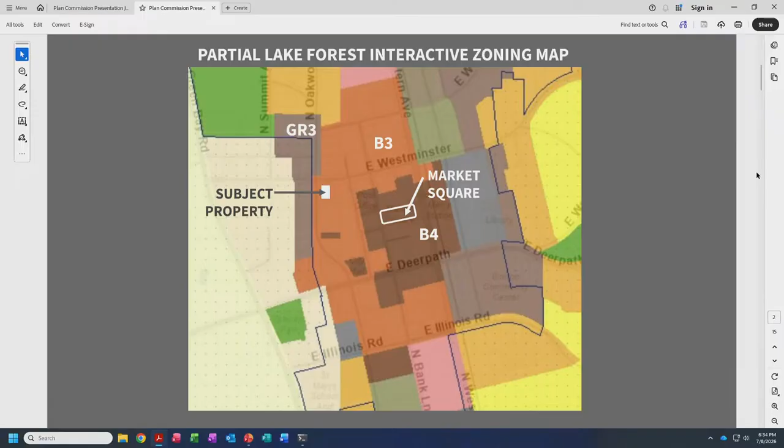Below our property is the large City of Lake Forest parking lot adjacent to City Hall. And to the left are the tightly knit GR3 residences that, even though the buildings are smaller in scale, are also quite dense.

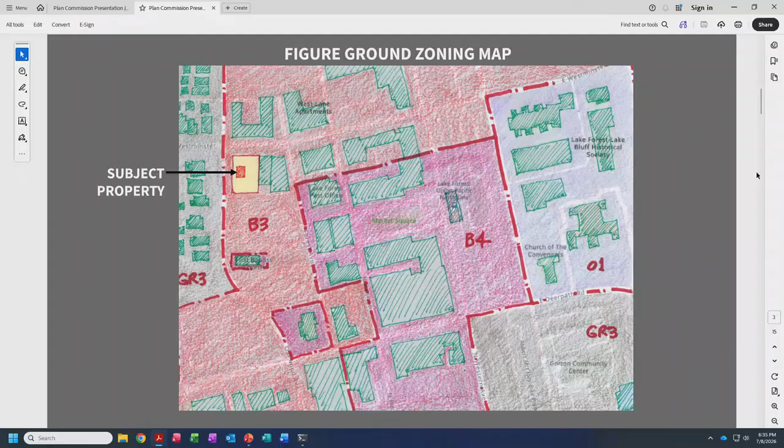According to the zoning requirements for this particular property, we are currently allowed to build up to 8,822 square feet of commercial building on the lot, or 0.75 FAR. As part of this code, we can request a special use permit to build up to 14,704 square feet, or 1.25 FAR, when 5 criteria are met.

As shown in the previous image, the existing building at 1,392 square feet is just 0.11 FAR. The existing building is woefully undersized for its lot compared to the allowable zoning restrictions. The property, in its current configuration, is not in keeping with the B3 commercial zone in which it is located.

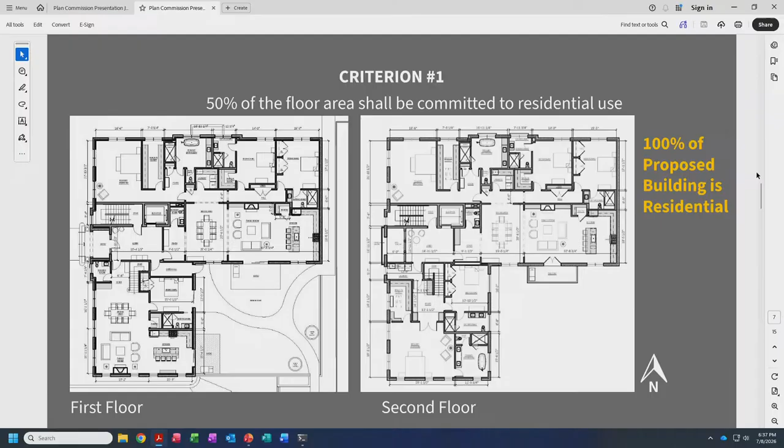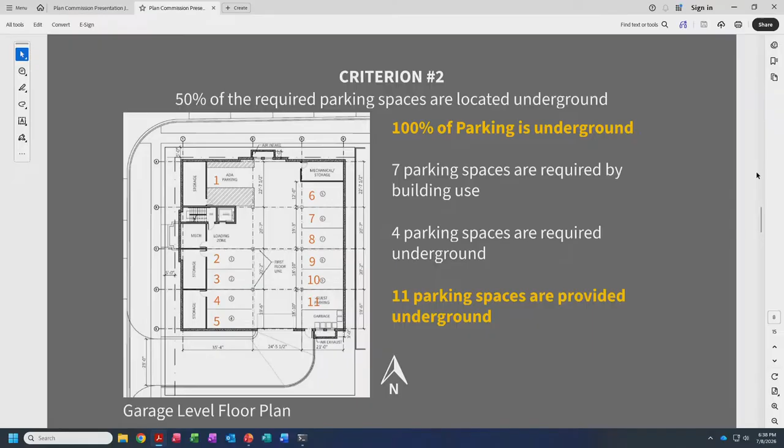Criterion number 5 states that the proposed building and landscape concepts must receive conceptual approval by the Building Review Board. This petition is currently proposed for Building Review Board review on September 2nd of this year. We intend on meeting the Building Review Board standards for the replacement structure and landscape design.

Following, I will show you our preliminary conceptual design renderings. Although technically not the purview of the Plan Commission, it's important to understand the building design in relation to our FAR request. Please note that the following building and landscape designs are continuing to be refined, so the concept renderings you are about to see may change slightly prior to our Building Review Board submittal.

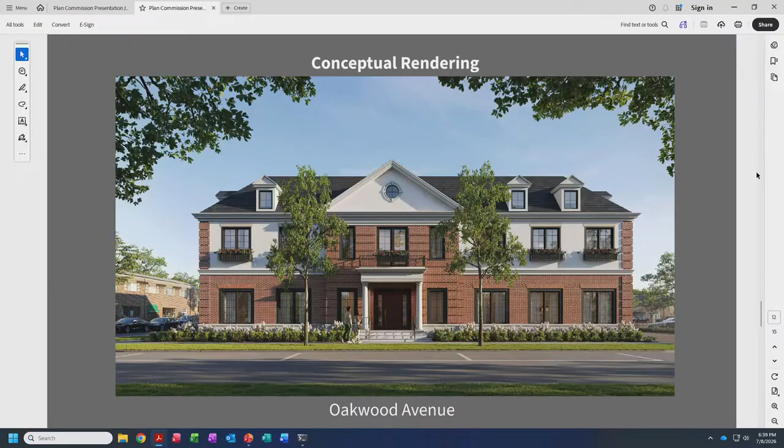This rendering illustrates the proposed Oakwood Avenue building facade. The design serves as a deliberate transition between the larger, more monolithic buildings within the B3 commercial zone and the smaller scale homes in the GR3 residential zone. The proposed building avoids the block-like massing characteristic of the commercial district by incorporating a two-story scale and sloped roof forms adjacent to the residential neighborhood.

This building massing provides an appropriate transition in scale and character. The prominent central brick feature and columned portico further reinforces the residential character of Oakwood Avenue, providing a familiar architectural element that helps bridge the scale and context of the surrounding neighborhood.

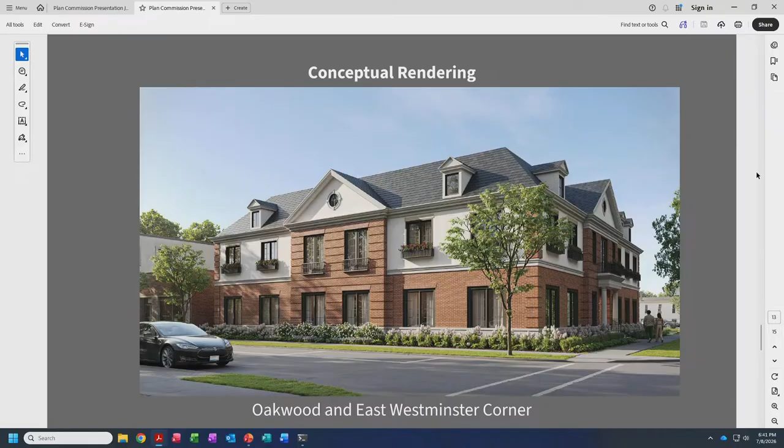In conclusion, we have demonstrated that criteria 1 through 4 for an increased FAR from 0.75 to 1.25 have been met for the Plan Commission. We look forward to addressing criterion number 5 at the Building Review Board meeting on September 2nd. Westwood LF Development LLC and Mellicar Architects have approached this project with a deep commitment to enhancing the character and quality of Lake Forest, and we appreciate your time and consideration this evening.

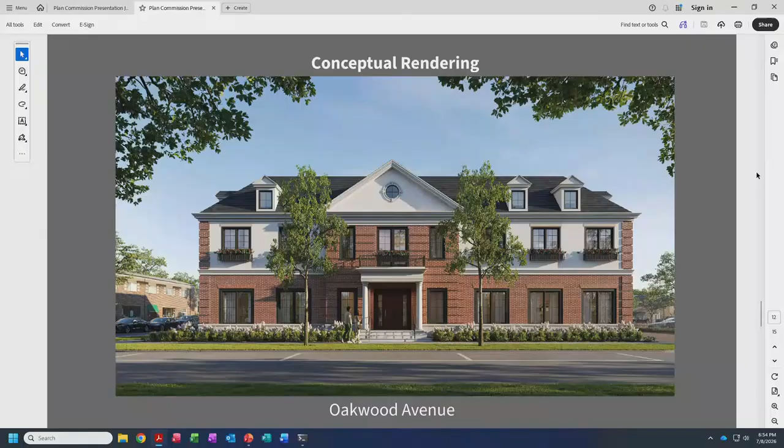But the wall here is 24 feet, and then this slopes up, and this little ridge, 10 feet back, is at 35, which, by the way, is very typical in the residential zones in general - the height of residential in our zones is 35 feet. So that's a residential scale.

And then this building is 5 feet from the property line. Is it also like Lilly Pulitzer, at 5 feet, so that it's 10 feet between the buildings? So you mean this building here? This building's right on the sidewalk. So this will be set back 5 feet from this building. Are they gonna be like, you know what I mean - is there gonna be an actual setback, or do they also have 5 feet? No, they're right on the property line.

I think it might show on the plat here. Let's see, I wasn't sure. You can barely see it here, but Lilly Pulitzer, Lily Alexander as it's called now, is right there. Oh, sorry, and our building's further back.

Another question - the parking spaces that used to be at the end, are you going to use that part? I know that's not part of this. You mean this, for the ramp? We're gonna lose 1 to 2 parking spaces there, but the way we see it, we're making up additional parking in the building itself. So guest parking basically gets eliminated and put underground. And then, of course, we're losing the...

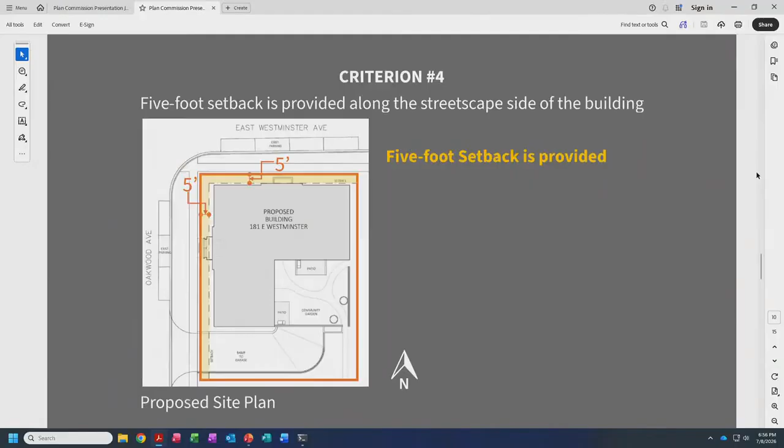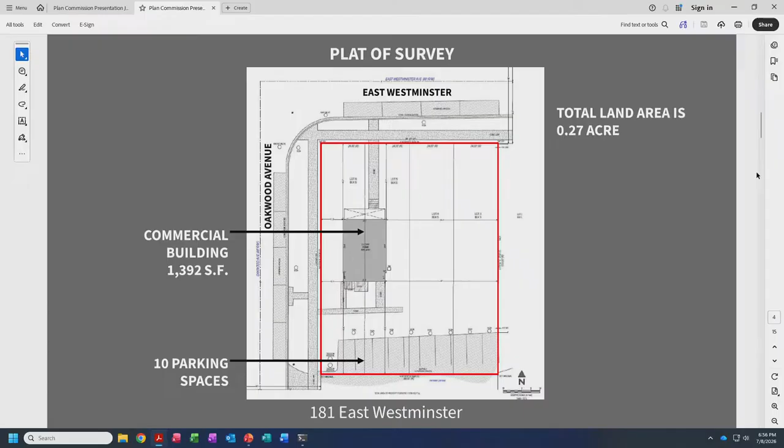Questions? Sure, go ahead. Yeah.

And maybe this is a question for you, Kathy, and maybe it'll come up during the building review board, but can you just comment on any requirements around trees on the properties and their removal?

The large tree on the Westminster Street side is not faring well currently. There will be a requirement for landscaping, and any impacted street trees will need to be replaced. We don't want large trees planted if they can't thrive, so we'll work closely with the landscape architect and city forester to determine exactly what should be planted and where.

The Building Review Board will see a landscape plan as part of their review. So the two large trees will likely be removed as part of the plan. The one on the north side is practically dead, so that one's in bad shape, and the other one will have to be removed.

Was there any consideration given to having the parking ramp accessed from the south rather than from the west on Oakwood Avenue? Is that a possibility to access through the city parking lot?

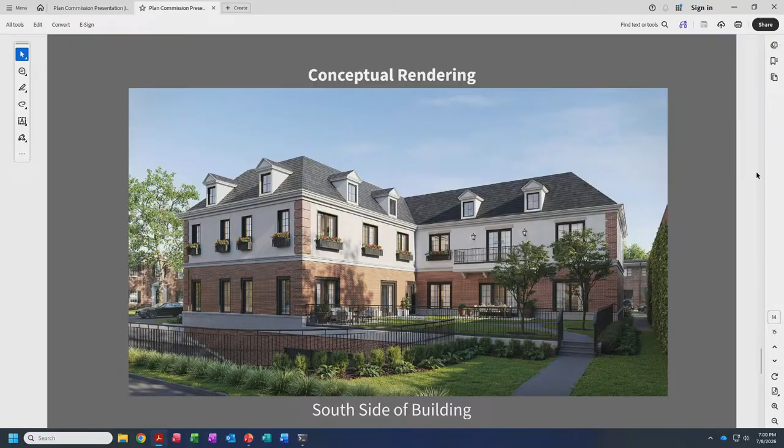To clarify, that open space requirement does not say it must be public open space. Okay, I'm sorry, I missed that.

My thought was just to address having the intent of the open space more viewable from the street, from a community perspective, which may be in opposition to the best intent for whoever is living there. We thought it was really important to maintain the streetscape here and here, to give these people privacy. If you opened up this corner, you'd have no light and air, or if we flipped this unit to the opposite direction, you'd get no light and air into the units. We were looking at it in terms of streetscape and also quality of living inside the units.

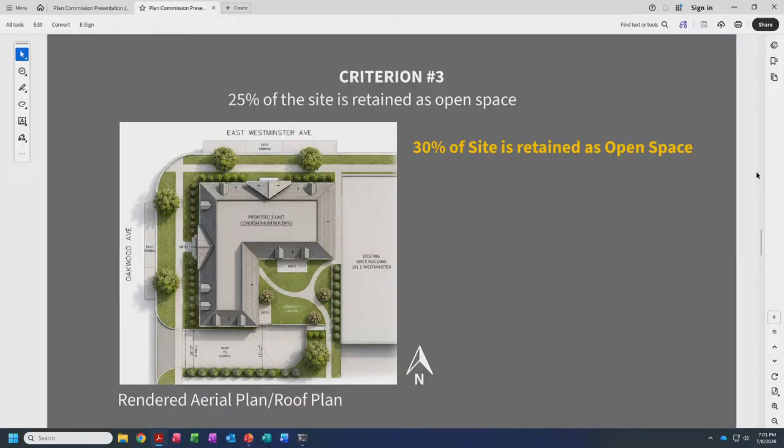Thank you. No other questions for me? All right, anyone else have any?

I'm not sure if this is our purview either, but if there's more than one unit, is there going to be a homeowners association? Is there going to be some type of thing to take care of the common area you've just been talking about?

I'm sure there will be, that's what Mr. Lynch is saying. I'm just the architect, so I don't do the legal stuff, I just do the quality of environment.

And then in your report you had mentioned at the end, 1,687 square feet that were requesting additional. I think it might have changed since then, it's actually gone down. It'll probably keep going down a little as we continue to refine, but we're not asking more than we're allowed, we're allowed to go up to 14,700, right? Right.

We're probably going to use about 10,500 of it. I was just curious. Very good. Again, we're looking at quality of space and how to fit into the neighborhood and make it work well.

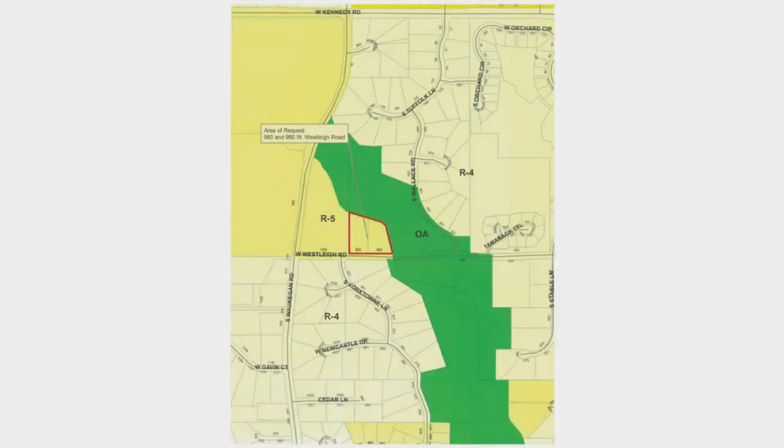Good? Okay. Thank you, Chairman Pasquesi, members of the commission. I don't have much to add to that.

When Mr. Bordoni first came to the counter and we talked about what he would need to do for some improvements to his house, it just dawned on us that instead of looking at this property as non-conforming to the R5 zoning and going through variance processes, it really made sense to align the zoning with the properties.

How do the properties come to be R5? For any property that's annexed to the city without any proposed changes, the zoning code requires by default that the R5 zoning district be applied. So that zoning district was applied decades ago. The homes were there. The homes are non-conforming. The lots are non-conforming.

All right. Very good. This might be the easiest we'll have. So, anybody have any questions? Request for— oh yeah, go ahead.

Mr. Erniak, it says this plainly in here, but it's important enough to me that I want to confirm that it's right. There's nothing that we would be doing, there's no implication of making this change that would allow another lot to be created, home to be built.